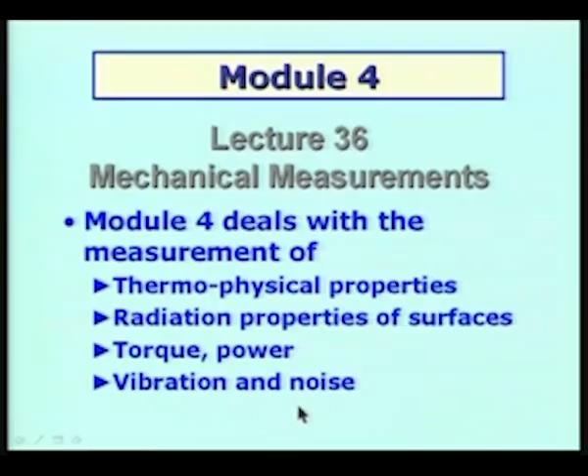The first topic I am going to look at is the measurement of thermo-physical properties. It is a very vast area, and necessarily we have to restrict to a few important thermo-physical properties. In my opinion, these are the ones which require a little bit of understanding, and the measurements are somewhat involved, and therefore I have included them in the presentation in this lecture and the subsequent lectures to come.

The quantities which will be of interest in thermal science basically are the properties of materials like thermal conductivity, which of course could be for any of the states of matter, solid, liquid or gas, and each one of them has a specific problem attached with them. Therefore we will certainly look at the measurement of thermal conductivity of various materials in the three states of matter.

We will be interested in the thermal capacity or the heat capacity of the materials, and that will be dealt with subsequently. One of the important things which we require when we talk about power plants, either based on fossil fuels or gases and liquid fuels and so on, is the measurement of calorific value of fuels. So we will deal with one or two examples of how to measure the calorific value. Basically the heat capacity and the calorific value of fuels are basically of the same type of measurements.

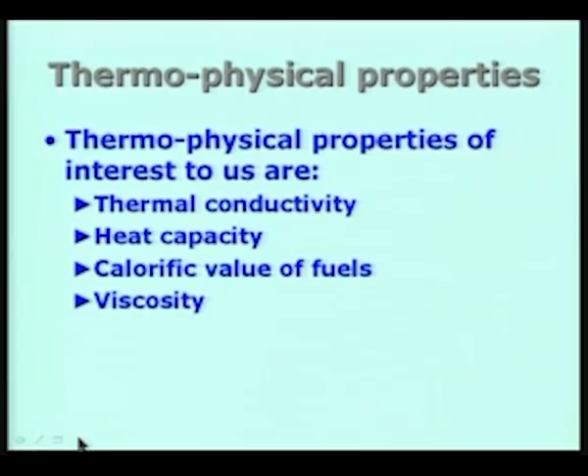Thermal conductivity, as you very well know, is a fundamental quantity of interest whenever we talk about heat transfer in any material, whether it is liquid, gas or solid. And of course, when you talk about conduction, only conduction heat transfer taking place, it is only in the case of a solid, assuming that of course the solid is stationary and there is no possibility of much movement in the macroscopic sense. So solid is the only case where thermal conduction can be actually studied in great detail.

In the case of both liquids and gases, immediately when you have a temperature gradient in the system, there can be some amount of movement because of density changes or density differences, and therefore we have bulk motion. So the main problem which we will have to address when we talk about the measurement of thermal conductivity of liquids and gases is the mechanism of how we are going to suppress these fluid motions, how we are going to minimize the effect of convection, so that we can study the conductivity or conduction phenomena in isolation. So that will be the major difficulty.

So the various techniques available can be classified broadly into two broad categories. We call them the steady state methods, and of course we have the unsteady or transient techniques. Steady state methods generally take a lot of time in terms of the time that is required to bring the process from the beginning to the steady state and maintain the system in the steady state. So the steady state methods are usually time consuming, and some of these methods will require days of time, not even hours. Several days will be required for the technique to come to the steady state condition.

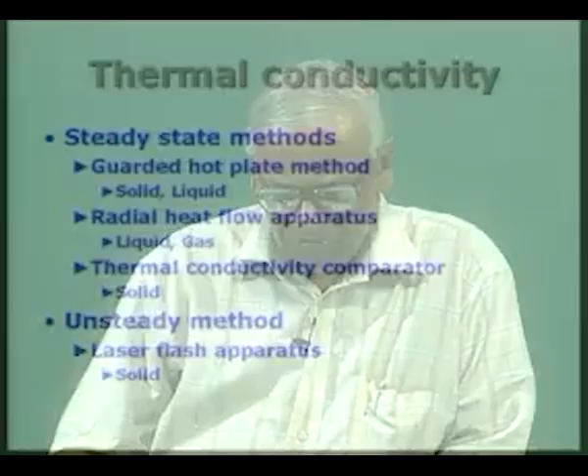In the unsteady method, the advantage is that the entire experiment is conducted very fast, maybe in a few milliseconds, seconds, or minutes, and there are some important advantages with the unsteady method. But unsteady methods are more expensive in terms of the equipment required generally, so we will discuss only one or two methods as we go along.

Among the steady state methods for measurement of thermal conductivity, the most important one is the guarded hot plate method, considered the primary standard for measuring thermal conductivity. It can be used for both solids and liquids, and I will demonstrate how it is done. Then we have the radial heat flow apparatus, which uses a very small gap between two cylinders, where the specimen, either liquid or gas, is placed in the gap, allowing heat transfer across it under a temperature difference. There is also a way of suppressing any convection taking place within the sample. The third method is the thermal conductivity comparator, used for measuring thermal conductivity of solids.

So the first topic I will look at is the guarded hot plate method, and I'll explain how it is useful for both solids and liquids. Then we will look at the radial heat flow apparatus, useful for liquids and gases, and then move on to the thermal conductivity comparator. In this lecture I may only complete the first two, and we will cover the rest in the subsequent lecture.

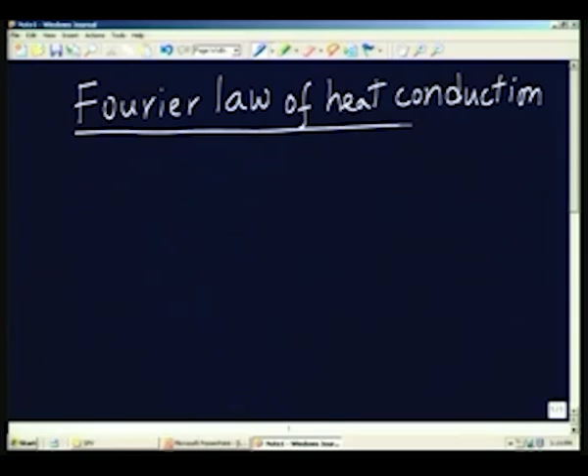The Fourier law of heat conduction states that the heat flux is a linear function of the temperature gradient. Temperature is a scalar quantity, the temperature gradient is a vector quantity, and heat flux is also a vector quantity because it has both magnitude and direction.

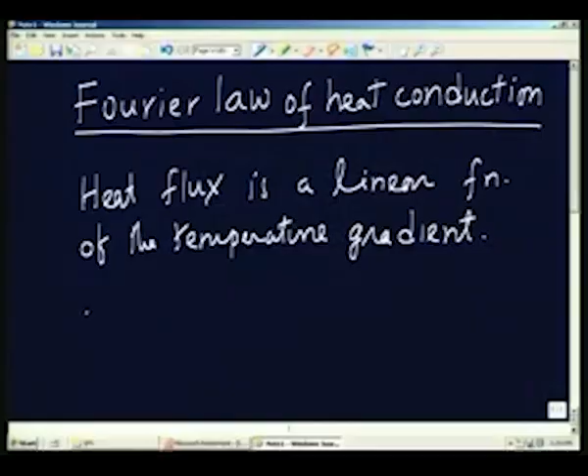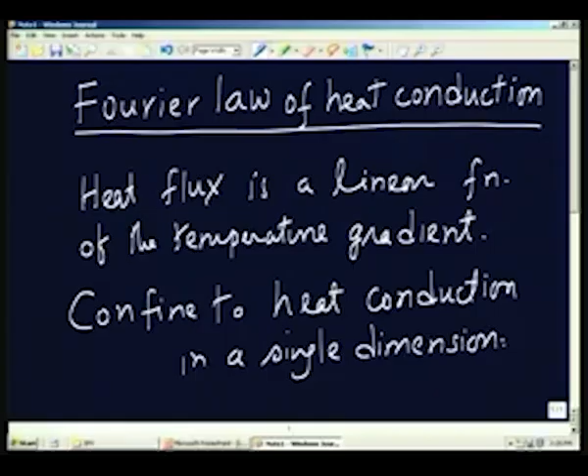In practice, we don't consider heat transfer in an arbitrary temperature field, but in a one-dimensional temperature field. So we confine ourselves to heat conduction in one direction, or a single dimension. This means the temperature is a function of only one space coordinate, which we can call x, y, or z, and the temperature field varies only with respect to that one coordinate, say x.

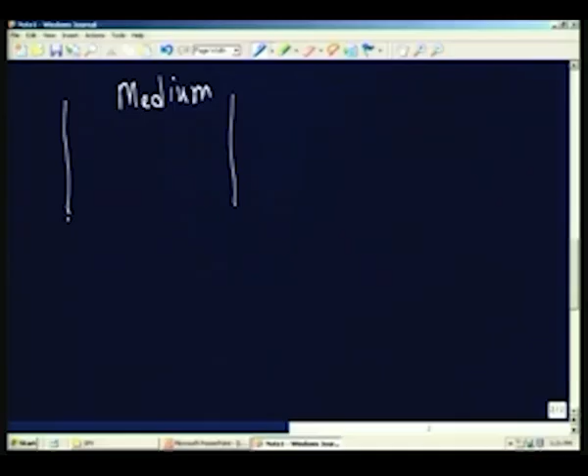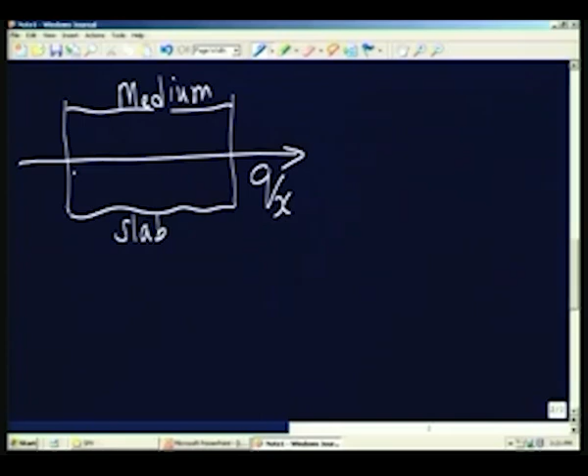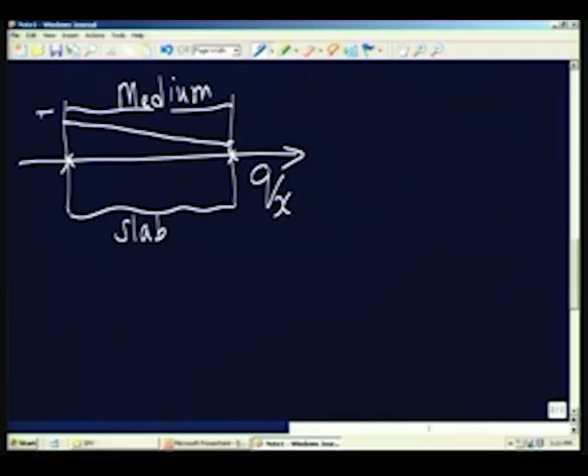So if I look at the Fourier law of heat conduction written for a single direction, I will show it using a material medium in the form of a slab. We have the direction of heat transfer indicated, with heat flux in the x direction. The temperature will vary from left to right, starting at some value T0 and ending at TL, with the thickness of the slab being L.

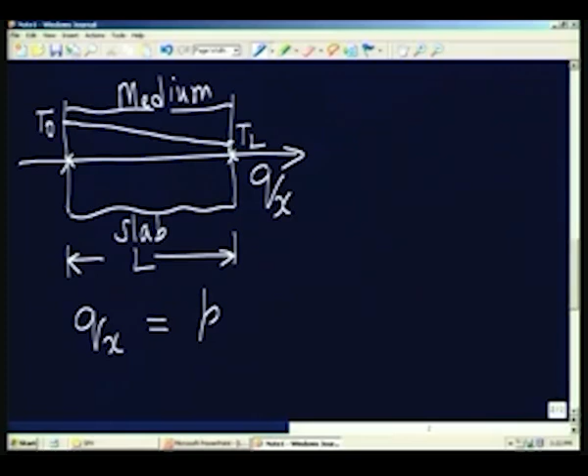We will write the equation as Qx, the heat flux in the x direction, given by K, the thermal conductivity of the solid or medium, multiplied by T naught minus T L divided by L. You can immediately see that the temperature gradient is T naught minus T L divided by L, and K is the thermal conductivity factor which is to be determined.

Qx is the heat flux by conduction. The units are watts per square meter, the rate at which heat is transferred per unit area per unit time, that is the amount of energy crossing per unit time and unit area of the slab. T naught and T L are the temperatures at the left and right end of the slab, and L is the thickness of the slab.

Of course, I am assuming that this is a slowly varying function of T, or not varying at all with T. If I make sure that the temperature difference T naught minus T L across the slab is very small, I can say that the thermal conductivity I am going to determine is actually at the mean temperature of the solid or medium, which is T naught plus T L by 2, and it is very close to that value since T naught minus T L is small compared to the mean.

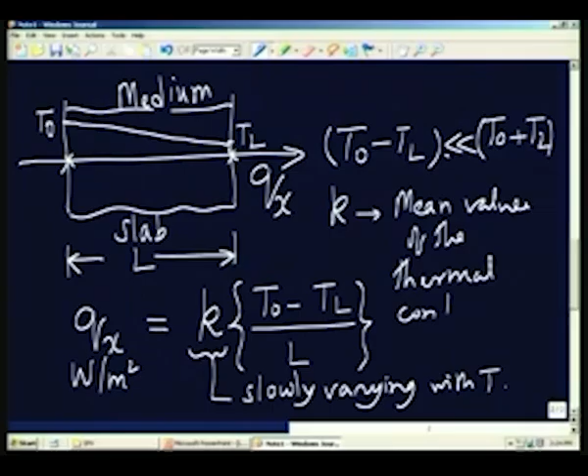So K is nothing but the thermal conductivity at the mean value. If I maintain a temperature difference of the order of 5 degrees, for example, between the two ends of this slab material, then it is close enough to being at the mean value, with the perturbation or change with respect to the mean value only plus or minus 2 or 3 degrees. So it will satisfy the requirement that the thermal conductivity I am going to determine is at the mean value.

Why I am talking about this is, if we have a medium whose thermal conductivity varies significantly with temperature, I have to conduct the experiment such that at any heating level or mean value of temperature, the perturbation or variation of temperature across the slab should be small compared to the mean temperature of the solid. That is how you have to maintain the conditions, so that thermal conductivity can be obtained as a point function, or as a function of temperature, where the temperature is identified with the mean value.

So, with this background, let us look at what one has to do in any experiment where I want to measure the thermal conductivity. One, I have to measure Qx, the heat flux. I have to measure the temperatures T naught and T L, and I have to measure the length or thickness of the solid or medium. So I have to do 4 measurements: Q, T0, TL and L. These 4 measurements are required before I can obtain the value of K.

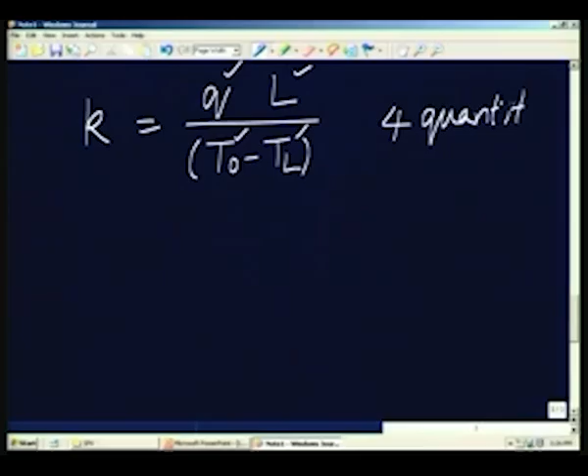Actually, what I am going to do is write it in the following way: K is equal to Q L divided by T naught minus T L. That is the expression for thermal conductivity. It requires the measurement of Q, L, T naught and T L — 4 quantities are required, 4 quantities are measured.

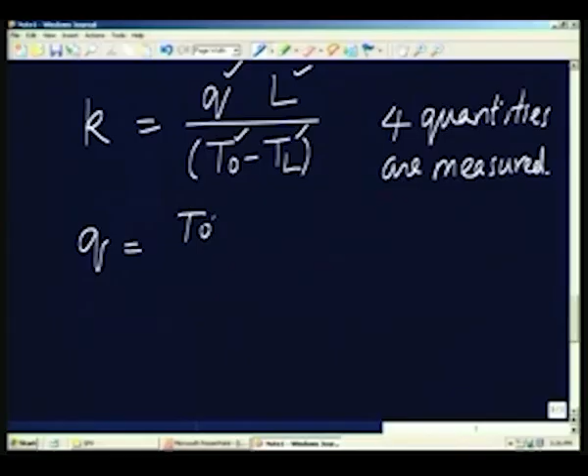Of course, in practice the temperature is measured using, for example, thermocouples. The length has to be measured using an accurate length measuring instrument. The Q is sometimes the most difficult to measure, because Q itself is the total heat transferred, divided by the area through which the heat is transferred.

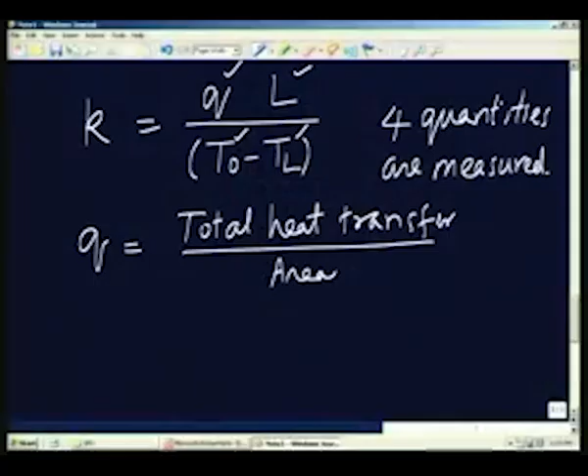The major thing one has to remember is that we have to maintain a one dimensional temperature field. That means the temperature varies only with respect to x, and there is no significant temperature variation in the transverse direction — only variation should be along this direction.

That will be guaranteed only if Q is truly in the direction shown, with no heat loss in a transverse direction. If we have an infinitely large slab, it is easy to maintain that, but in practice an infinitely large slab is not possible, so we always have a finite size sample. When the sample size is finite, it is difficult to maintain one dimensional heat transfer in a particular direction without any losses in the transverse direction. That is the major thing one has to look at.

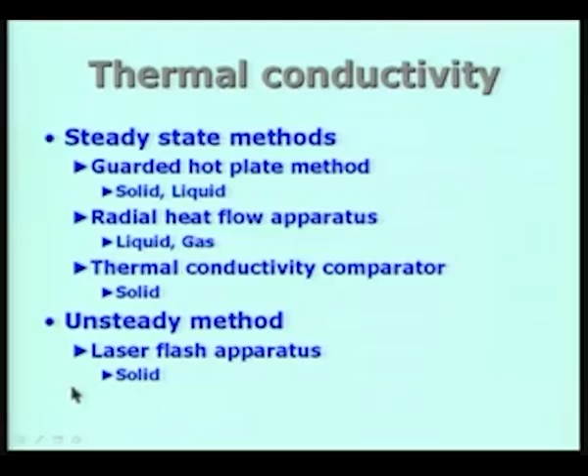Let us look at the principles involved in doing that, and I will try to do that with the guarded hot plate apparatus. I will indicate how it is done. Before we do that, let me recapitulate or summarize what I have talked about.

The first goal is to achieve one dimensional temperature field within the medium. I have to measure the heat flux, that is, the amount of heat transferred per unit area in unit time. I have to measure the temperature gradient, either by measuring the temperatures individually and the length separately, and then taking the ratio. Using these four quantities, Q, L, T naught and T L, I will be able to estimate the thermal conductivity.

The additional problem when we come to liquids and gases is how to suppress convection. In the case of solids, the advantage is that there is no possibility of any movement of the solid in the macroscopic sense, so I do not have to worry about suppression of convection. For suppression of convection in liquids and gases, either I can use a very short time for the experiment as in unsteady or transient methods, or I have to take special precautions so that these movements are not present.

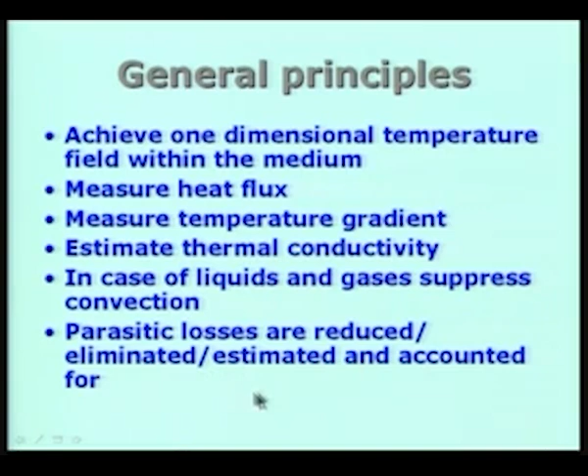Finally, we have to look at the parasitic losses. Even though we aim to achieve one dimensional temperature field, how closely are we able to do that? There will always be some parasitic losses. These have to be reduced or eliminated, or in the worst case, we have to estimate what these losses are and account for them, so that the estimated value of thermal conductivity is of acceptable accuracy.

Let us look at one simple arrangement. Earlier, when we talked about measurement of heat flux, we already looked at the concept of the guard. A guard heater helps in reducing the losses in a transverse direction, and therefore makes the temperature field or heat flux one directional or one dimensional.

In the guarded hot plate apparatus, for a solid sample, I take two samples of identical size and thickness, same material, same physical dimensions. I am going to use them in a symmetric arrangement, with a heater in between these two samples in a sandwich construction.

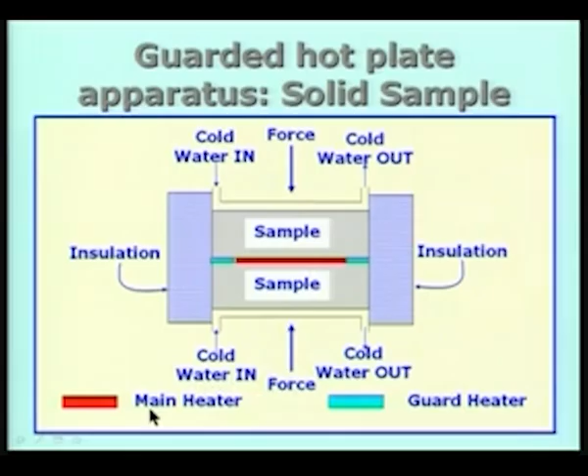Let us look at the typical construction of the guard and main heater. This sketch indicates what is happening. We have the main heater, which is something like 200 millimeters by 200 millimeters. This is the smallest size. You can have a much larger size if one wants to, in fact even 1 meter by 1 meter. In some situations it is necessary to use very large sizes. Of course if we use a large size, a large amount of heat has to be supplied, and also you require a very large sample and so on.

So the minimum is something like 200 millimeters by 200 millimeters for the main heater, and then you have a 50 millimeter wide guard heater all around it with a small narrow gap. Of course the gap shown here is too large, only for the sake of illustration. The actual gap can be something like 2 millimeters. So you have a 50 millimeter wide guard heater, then a 200 by 200 millimeter main heater, and we fix thermocouples as shown here. Across the gap I have 2 thermocouples. These closed circles are thermocouple junctions. I have 2 junctions here, 2 here, 2 here, and 2 here, and the delta T indicated by these thermocouple pairs must ideally be equal to zero.

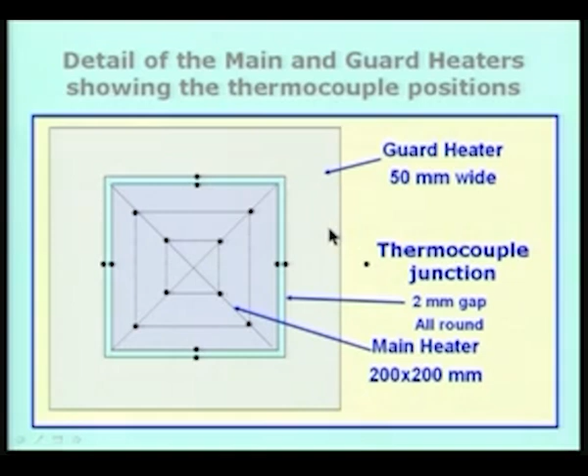So let us look at the typical experimental conditions which we are going to have. The sample size: 200 by 200 by 25, this is for the main guard region, the main heater region, plus 50 mm you add on all these sides. So actually the sample size will be 300 by 300, 200 plus another 50 on either side. So 300 by 300 by 25 mm. This is the main heater size only I have given here.

Typically the heat input is adjusted such that the temperature difference across the thickness of the specimen is roughly equal to 5 degrees. We do not want to have a very large temperature difference across the thickness of the sample.

The question now arises as to what do we do if we have a high thermal conductivity material, what do we do when the thermal conductivity of the material is very low. You can immediately say that from Fourier's law, if the thermal conductivity is small, for a given heat transfer you require a larger temperature difference. Or putting it another way, if thermal conductivity is small, for a given temperature difference the amount of heat input is small.

If you want to have a 5 degree Celsius difference across the thickness of the material, you have to adjust, knowing roughly the thermal conductivity value of the material, we can find out what is the amount of heat I have to supply. That will vary depending on the material.

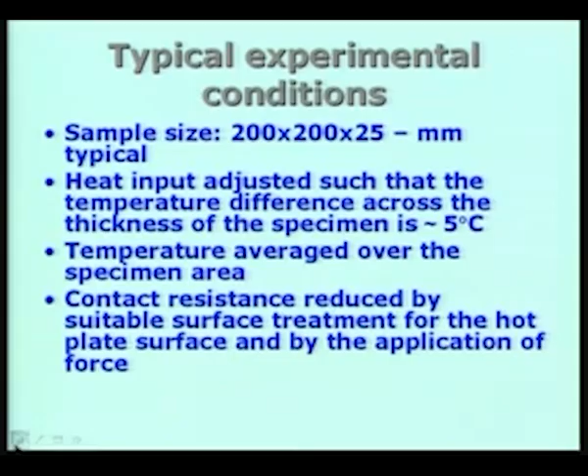With this basic understanding, let us look at the example. This is example 41. We have a guarded hot plate apparatus which is used to measure the thermal conductivity of insulating material. The specimen thickness is 25 plus or minus 0.5 millimeter.

I am going to look at a typical case where the thickness is measured with plus or minus 0.5 mm precision: 25 plus or minus 0.5 millimeter. The heat flux is measured within 1%, and the nominal value has been obtained as 80 watts per square meter. The temperature drop across the specimen under steady state has been measured to be 5 plus or minus 0.2 degrees Celsius. So all the measured values I have are the nominal value plus or minus the expected error: 0.5 mm in the case of thickness, 1% in the case of heat flux, and plus or minus 0.2 degrees Celsius in the case of temperature difference. So, determine the thermal conductivity of the sample along with its uncertainty.

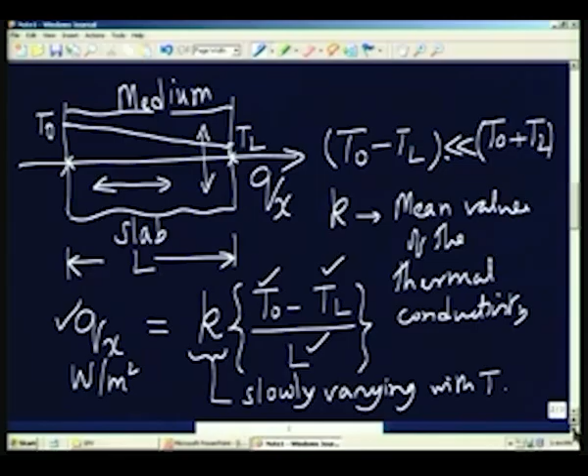So I will work it out on the board. This is example 41.

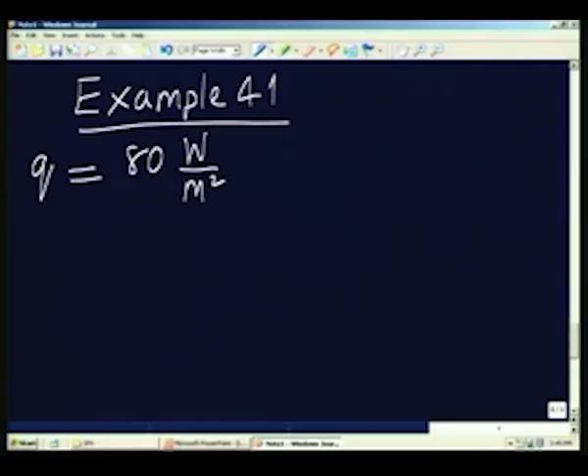The heat flux is directly given. In practice, one would have to measure the total heat supplied to the main heater divided by the area of the main heater to get the heat flux. In this case it is directly given, so I will write Q as 80 watts per square meter. This is the nominal value, and the error is plus or minus 1%.

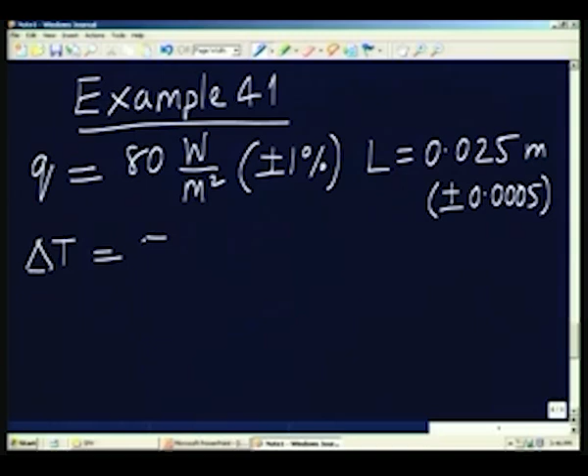Then I am given the thickness of the sample L, which is 25 millimeters, or 0.025 meters, plus or minus 0.5 millimeters, which comes out to plus or minus 0.0005 meters. I am writing everything in SI units, and delta T has been measured as 5 degrees centigrade plus or minus 0.2 degrees Celsius.

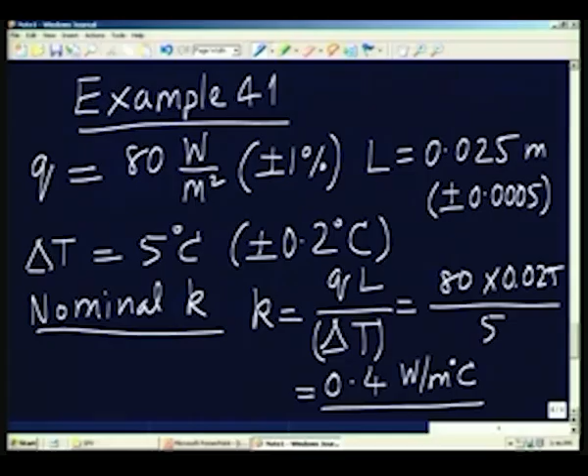It's a very simple problem. So the nominal K I can calculate using the Fourier law of heat conduction, which is Q times L divided by delta T, where T naught minus T L is nothing but delta T. This will be 80 multiplied by 0.025 divided by 5, which comes to 0.4 watts per meter degree Celsius. This is the nominal value. It is very simple and straightforward - plug into the expression and get the value of the thermal conductivity.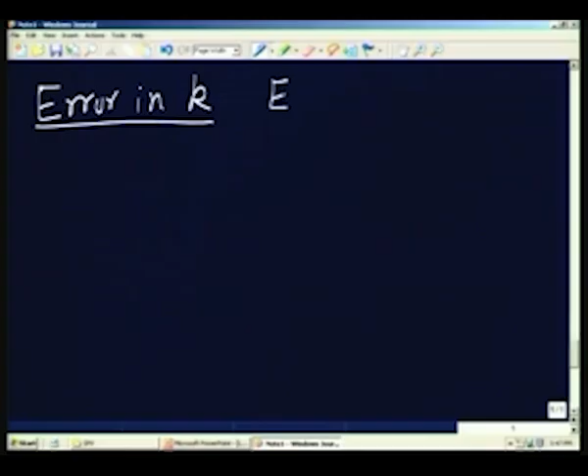The next part is to look at the error in K. I have to use the error propagation formula, which is familiar to us from our first module when we talked about estimation of errors in measured quantities. In this case, we are measuring Q, the heat transfer per unit area per unit time, we are measuring thickness, and we are measuring delta T. All of them are prone to errors, and since K is related to these quantities as the product of Q and L divided by delta T, I can use logarithmic differentiation to obtain the value of the error.

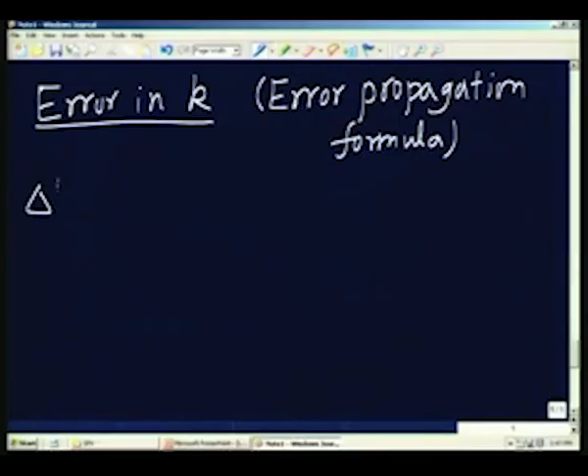Delta K by K will be plus or minus the square root of delta Q by Q whole squared, plus delta L by L whole squared, minus delta T by T whole squared. Because it is squared, this minus sign doesn't make any difference, so I can just write the quantity. Delta Q is 1%, so delta Q by Q is 0.01 whole squared. Delta L by L, I substitute the values as 0.0005 divided by 0.025 whole squared, plus 0.2 divided by 5 whole squared - all ratios. When you compute that, the entire thing comes to plus or minus 0.042, so delta K by K equals 0.042, or about 4.2%.

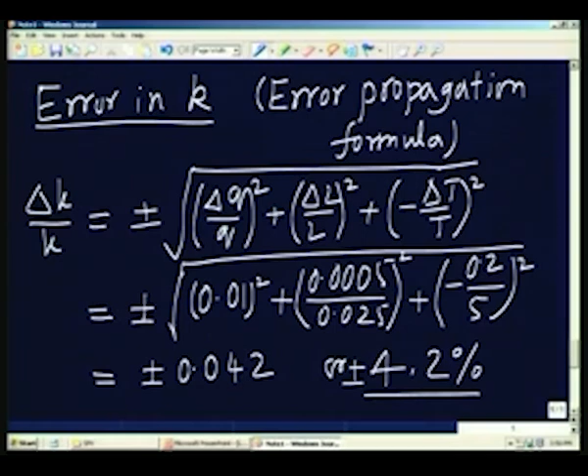This is a very typical value of error when you use a guarded hot plate apparatus. According to normal standards specified for the guarded hot plate apparatus, about plus or minus 5% is the expected uncertainty in the measured thermal conductivity, and in this example it is within that value, within plus or minus 5%. So we can say this is plus or minus 4.2%. In fact, I can now specify the thermal conductivity of the solid will be 0.4 plus or minus 4.2%.

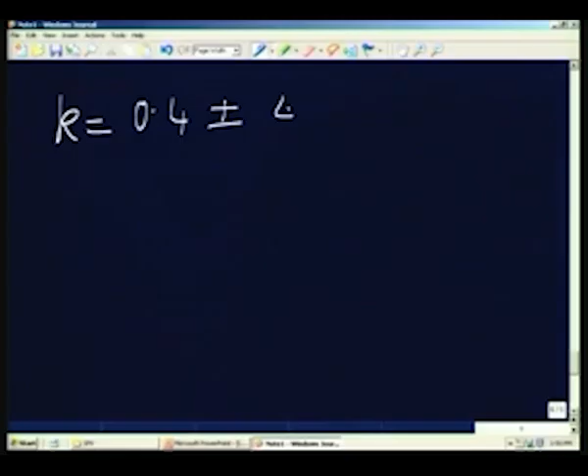This is in watts per meter degree. So, I can specify it as 0.4 plus or minus 4.2%. That is the value which we will get using this particular method.

So, what we have done is to look at the measurement of thermal conductivity of a solid using a guarded hot plate apparatus, and we have taken an example and seen how to work it out, and also seen the type of expected error in this measurement.

If we recapitulate what we have already talked about when discussing measurement of temperature, measurement of heat flux and so on, the kind of numbers I have used in this particular example are typically the numbers which we discussed earlier. So, we know that in the case of measurement of temperature difference, plus or minus 0.2 degrees is an achievable value.

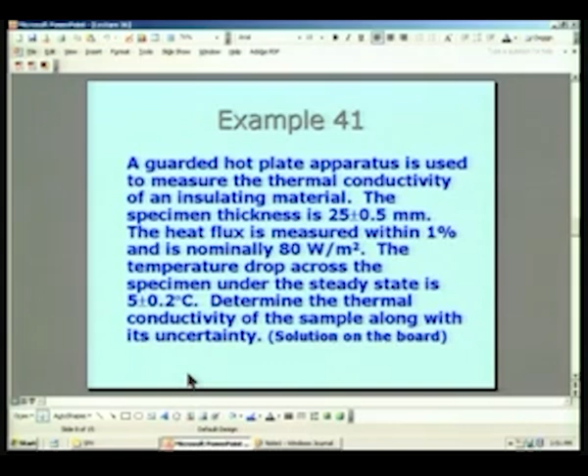Similarly, with respect to heat flux and with respect to the specimen thickness, plus or minus 0.5 millimeters is a very, very nice value. Actually, the reason it comes out as plus or minus 0.5 is not because we are unable to measure the thickness, because many times the guarded hot plate apparatus is used for measurement of the thermal conductivity of a sample as received from the manufacturer.

You just cut a small portion of the slab, usually in the form of a slab or a plate, and you do not do much surface treatment. No treatment is given on the surface, no machining is done. Usually it is just taken as a slab as obtained from the manufacturer.

And many times we use this method. In this case, for example, the material has a thermal conductivity of 0.4, which is characteristic of an insulating material, and usually the thickness is not very closely specified for such things, so plus or minus 0.5 mm seems to be a reasonable number for this. It is not measurement related, it may actually be the material itself, the thickness varying from position to position.

Let us look at what we have to do if we want to use the guarded hot plate apparatus for a liquid sample.

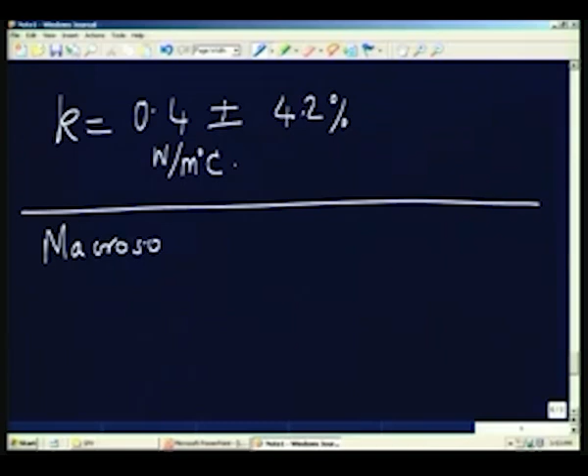The main thing I have already mentioned is that when you use a liquid sample, there is the possibility of macroscopic movement of the liquid.

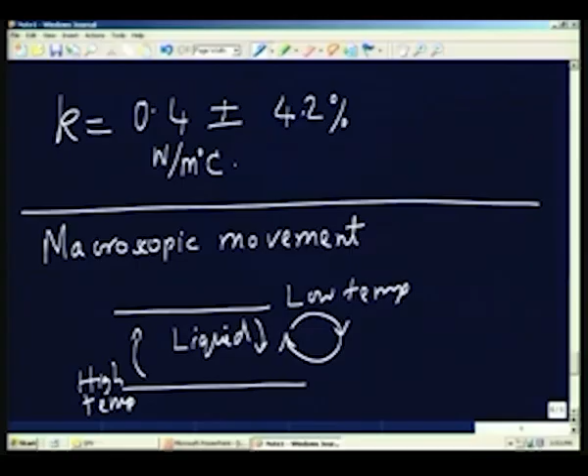Suppose I have a situation like this: a high temperature, as indicated here, and a low temperature here, with a liquid in between. Normally, at a high temperature the density is smaller, and at low temperature the density is higher, and therefore the liquid will be lighter near the hot wall and will tend to move up, while the colder liquid moves downwards. So you expect some kind of up and down motion. This is referred to as natural convection.

What is the consequence of this natural convection? The consequence is that heat transfer is not simply by conduction, it is also because of this bulk motion, and therefore the heat transfer is actually much more than it would be if heat transfer were by pure conduction alone. So if I make an experiment with a high temperature at the bottom and a low temperature at the top, I am certainly not going to measure the thermal conductivity. I am measuring something that includes also this effect of the thermal motion.

So you can immediately see that if I were to put the high temperature at the top and the low temperature at the bottom, much of this movement can be completely restricted. That means the natural convection which occurs because of density changes or density gradients can be reduced or eliminated by using high temperature at the top and low temperature at the bottom. This is in fact the first thing which we are going to do.

The second thing is the thickness of the liquid layer. If the thickness of the liquid layer is very small, it also inhibits natural convection. Therefore, two things I can do: I will take the liquid in the form of a very thin layer, maybe a few millimeters or even less than a millimeter, so that there is not enough chance for this natural convection to set in.

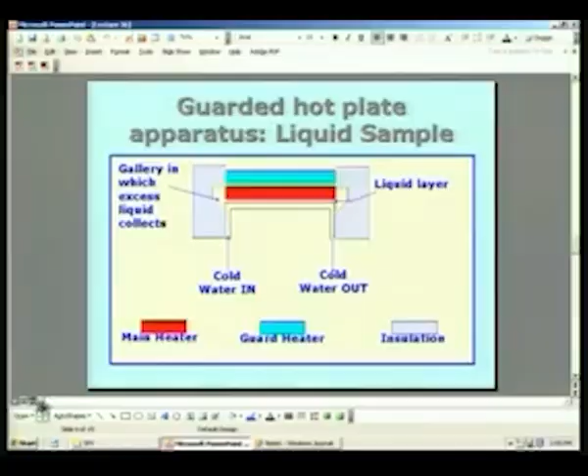Secondly, I am going to put the high temperature at the top and the low temperature at the bottom, and that is what I have shown in the next slide, where I have the main heater here.

Because I want to put the high temperature at the top and the low temperature at the bottom, I cannot use the symmetric arrangement which we had earlier. If you remember, in the case of solid, I had two samples, one at the top and one at the bottom, and half the heat went from the top side and half from the bottom side. Here I cannot have that facility, because I want the high temperature at the top and the low temperature at the bottom. The only way I can do that is to have a single layer of the sample.

So I have a single sample layer, and therefore the main heater in this case will have to be backed by a guard heater. There is a guard heater here and the main heater here. What I will do is monitor the temperature difference across these two, and if it is made equal to zero by suitably controlling the amount of heat given to the guard heater, then I can assume that all the heat generated in the main heater has to go only from the bottom through the liquid layer.

In this case, the guard is doing something different from what was done in the previous case. There, it was trying to make it one dimensional by preventing heat loss from the lateral side, but here it is actually preventing heat loss from one side altogether, so that there is purely conductive heat transfer across the layer of the liquid.

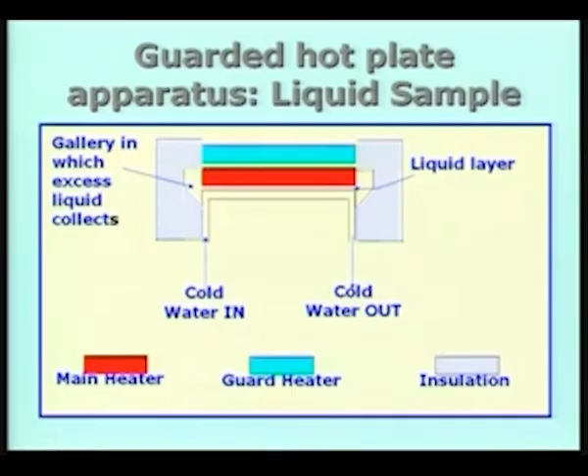There is another way of doing the whole thing, which is a radial heat flow apparatus, and it is used for both liquids and gases. Let me describe the radial heat flow apparatus. In the other two cases, the sample was in the form of a slab, either a solid material in the form of a slab or the sample of liquid in the form of a layer, which was a planar layer.

The sample fluid, either a liquid or gas, has to fill this narrow gap, and usually the gap is very small. The gap thickness could be sub-millimeter in diameter, maybe 0.5 millimeters or 0.3 millimeters. Therefore, it is very difficult to fill that gap.

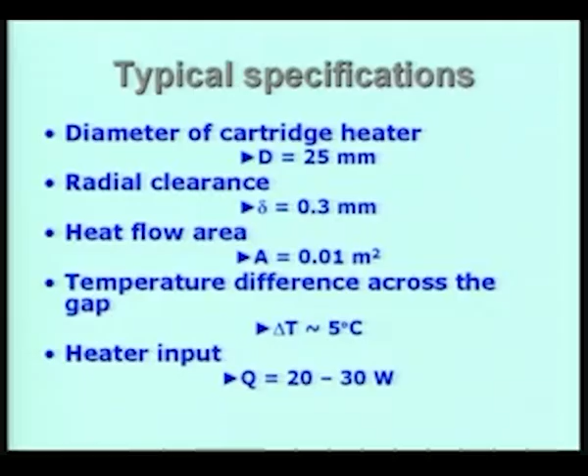But before we do that, let us look at the typical numbers. Diameter of the cartridge roughly 25 millimeters, radial clearance 0.3 millimeters, the heat flow area, pi d into L, is about 0.01 square meters, the temperature difference across the gap is roughly of the order of 5 degrees, the heat input can be between 20 and 30 watts depending on the liquid or gas taken inside. If it is a gas, the heat transfer will be much lower.

If it is a liquid, it could be even 20 to 30 watts of heat put in, and the heat is put in the form of electrical heat. The cartridge heater contains an electrical resistance inside, and you measure the heat supplied by the amount of electrical power supplied to the heater. So if you know the heater resistance and the voltage across the leads of the heater, I can find out the amount of heat input, and that will be exactly equal to the amount of heat going through the narrow gap through the sample by conduction plus any losses.

The difference between the previous method, where I had a guard to reduce heat transfer losses, and here, is that in this particular case the losses are not zero, the losses have to be estimated.

If you remember, in the very first slide I said the losses can be reduced, eliminated, or estimated and accounted for. So in the present case, what I have to do is find out what the loss is, and let us look at how I am going to do that.

Suppose I take either a liquid or a gas of known thermal conductivity in this gap. The easiest thing is to take air, you do not have to do anything, air is everywhere, you just allow the entire gap to be filled with air. So the gap here is full of air, and the thermal conductivity of air has been measured very accurately by various people.

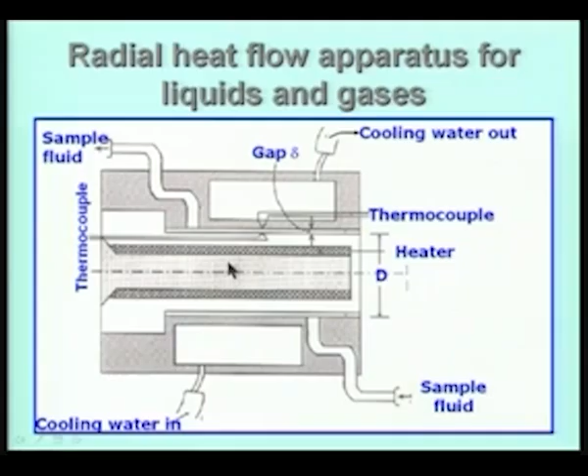So I will find out this amount, and then I also measure the amount of heat input into the cartridge heater. If I take the difference between these two, that will give the loss. Let me write it on the board.

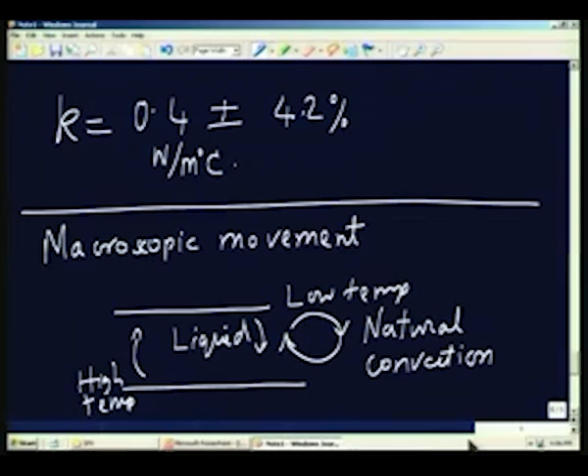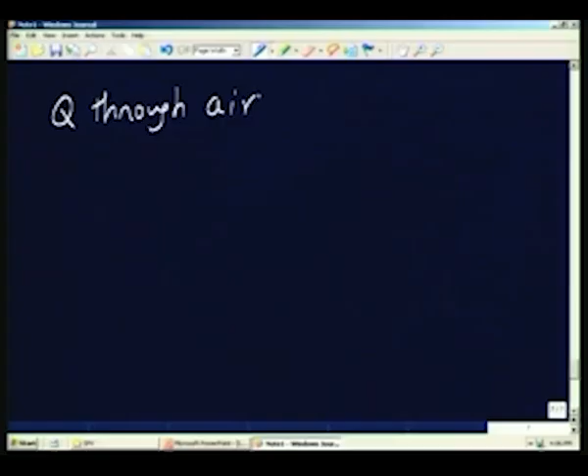So what I am going to do is, Q through air is estimated based on K of air, delta T, and other geometric parameters.

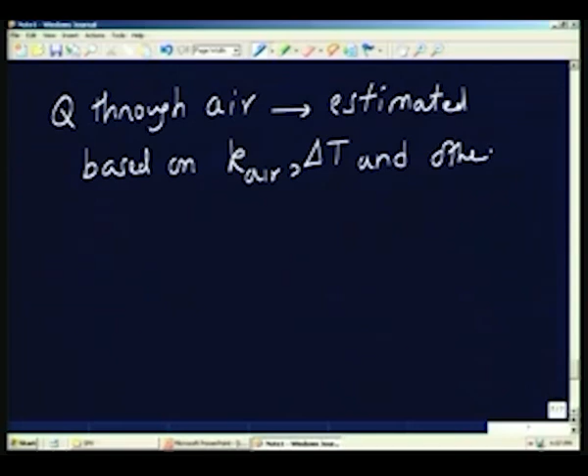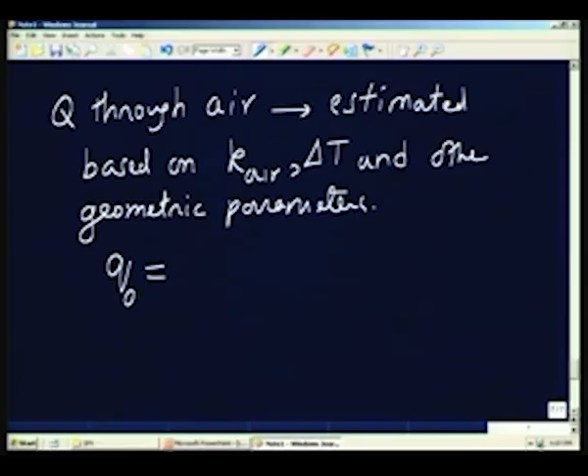So we know that Q through air will be K multiplied by delta T divided by delta, because we are assuming that the radial clearance is very small. So it is almost like slab heat transfer through a plane parallel layer.

So K delta T by delta, and if I multiply this by A, the heat transfer area, I will get Q air. Q supplied minus Q air is equal to the loss, which we will call L, and this will be a function of delta T, the temperature difference across the gap.

The theoretical basis is the following: when I have a different sample, not air, in that gap, I am assuming that if the temperature difference across the gap is the same as in the air experiment, the amount of heat loss is not going to change much. So the experiment with air, whose thermal conductivity is known, gives me a handle on the problem of heat loss from the system, which will be a function of delta T.

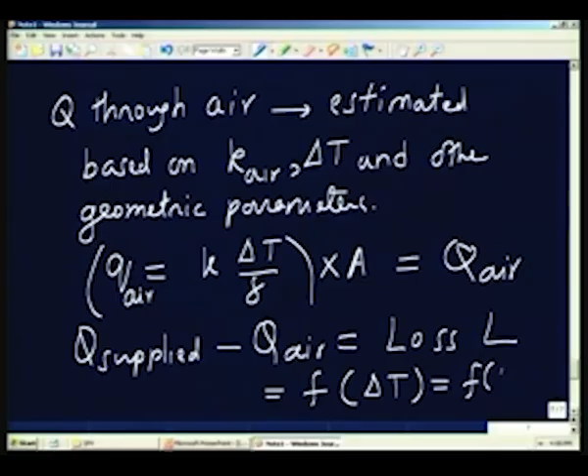So if I call delta T theta, this becomes a function of theta, and in fact I have data for a particular setup in the form of a heat loss calibration chart. You can see that as the temperature difference changes from 0.5 to about 10 degrees here, the heat loss from the system goes from about here to about 3 to 4 watts.

So suppose I am performing an experiment with a liquid of unknown thermal conductivity, I find out the temperature difference, and then get the corresponding value of loss from here, and I subtract this from the total amount of heat supplied through the plug. That will be the actual amount of heat transfer through the sample liquid I have taken in the gap between the inner and outer cylinder. So I can now find out the amount of heat transferred by conduction alone, and then obtain the thermal conductivity.

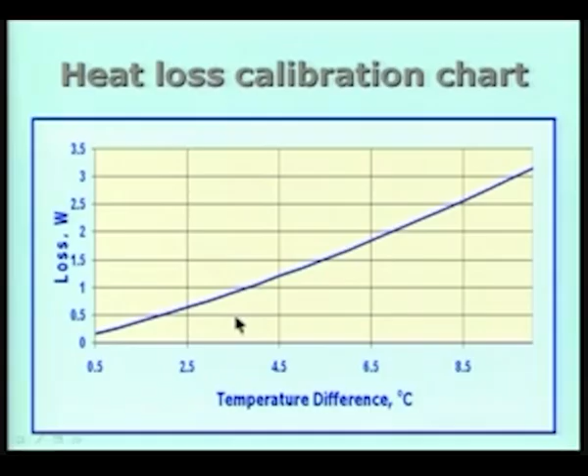The second point is, because the gap between the two is very small and the delta T is also very small, generally of this order, there is no appreciable movement of the liquid, and therefore I can assume that it is purely conductive heat transfer. We will pursue a problem corresponding to this particular technique in the next lecture.